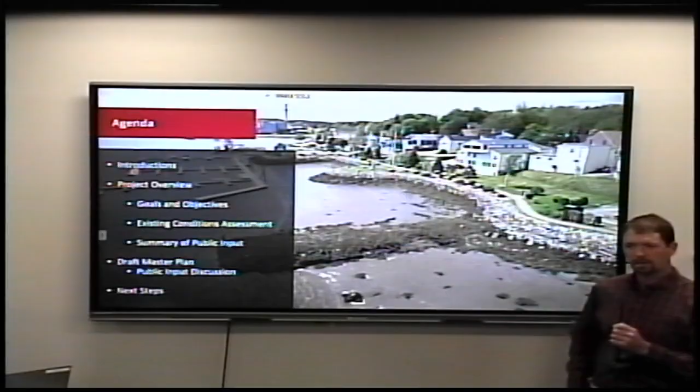We're going to do brief introductions, again, to introduce you to the town's representatives as well as our team that's working on the project. Give a brief project overview, similar to what we did at the last meeting, talking about why and how we got here, what we've heard so far from the public, a little bit about our existing conditions assessment of what we're seeing down at your waterfront. Then we'll do a draft overview of the master plan and open it up for some public comments tonight. As Rich mentioned, folks online can also, I believe, call in with questions. And then we'll talk a little bit about next steps as it's anticipated to conclude this concept planning phase by the end of December.

Okay, so real briefly, my name is Travis Pryor. I'm the project manager involved with this effort. I worked with the town initially on an existing conditions assessment of your shorefront a couple of years ago in light of some of the coastal storms and erosion that you were seeing along your waterfront. My name is John Garreau with GEI Consultants, engineer supporting the concept designs for the improvements here. And I'm Rich Rotella, Community and Economic Development Director. I'm in charge of the SHIP grant that has provided us this opportunity to have this draft master plan.

Jay? Jay Lanfer, I'm Director of Public Works here in town. Mike Wormsby, Harbor Master and Marina Manager. We also have Mark Eastman, who's been participating as a town councilor, who's not here tonight, as well as Luke, who is your codes enforcement officer.

Right, so the project area that we're defining as the downtown waterfront is generally along the length of the waterfront walkway from Steamboat Wharf Lane out to where the walkway ties back into Main Street, just beyond the Irving and Circle K building. And it's anywhere from Main Street, generally looking down to the Penobscot River along the shoreline.

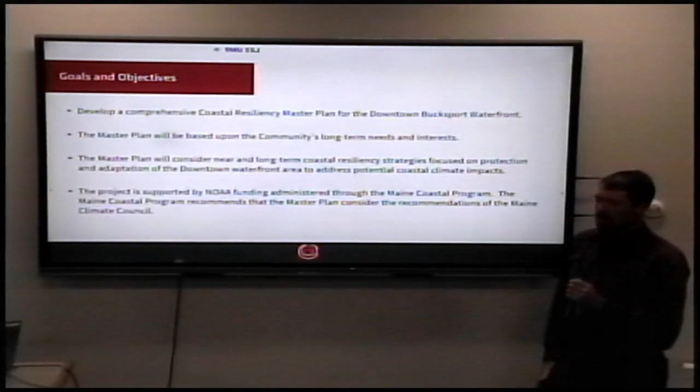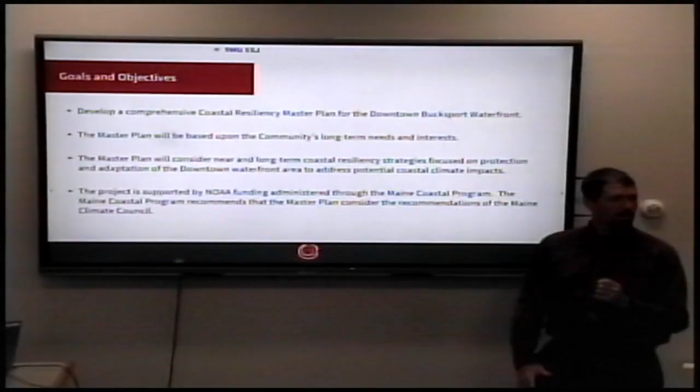Some of the goals and objectives that initiated this master planning effort was to develop an overall comprehensive study looking at the entire downtown waterfront and not just at the shorefront stabilization, which is one piece that needs to happen down there. But while you're at it, what are some of your long-term plans potentially that should be coordinated for improvements to your town pier, to the walkway, to the marina facilities, and so on. So we're developing a concept level overall master plan that suggests coordination with a variety of things that could happen down there to make it more resilient to potential future flood risk scenarios and increased precipitation events.

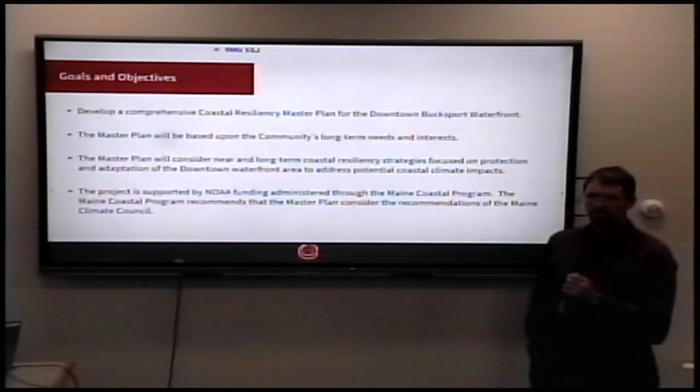One of the primary goals as well is to make sure that the plan is well endorsed and supported by the community and based on the community's values and input and goals for improvements down at the waterfront. To make sure that it considers both immediate and near-term needs for improvements down there as well as long-term ones. Oftentimes when you're doing public infrastructure improvements to an area like this, you could be looking at hundreds of thousands, if not millions of dollars in improvements, and you want to make sure that they're projected to last for a long time. So we do look at some of the climate risk factors a little further out than over the next 25 years or so, all the way through 50 or 75 years for the normal life expectancy of the infrastructure we're proposing.

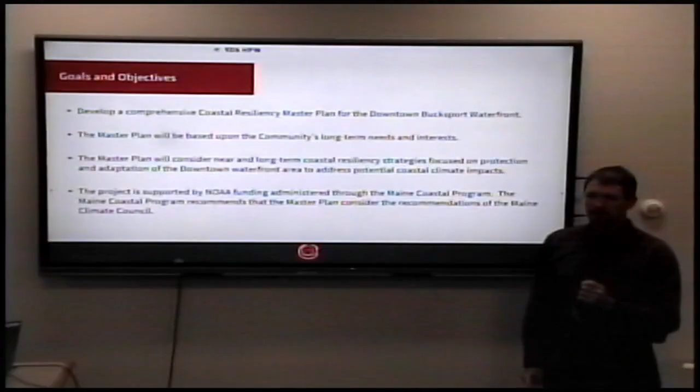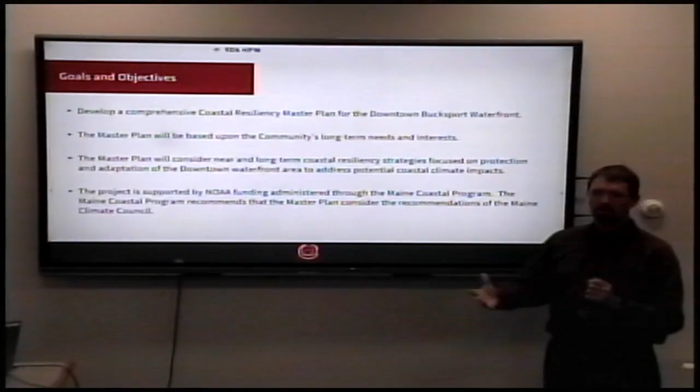The project is supported by the National Oceanic and Atmospheric Administration, who provides federal funding through the Maine Coastal Program for studies of this nature. And they do have some program goals about making sure the master plan considers the Maine Climate Council's recent study in their climate action plan, which has some commit to manage levels in consideration of relative sea level rise, and I'll talk about those again a little bit, and then some prepare to manage levels. Those look at a variety of potential computer modeled scenarios for different coastal flood risks into the future.

We conducted an existing conditions assessment, not only with the shorefront stabilization work in 2022, but also at the start of this project. We know there's a long history of coastal activity within the Penobscot River and along your waterfront. So we looked at some of that, recognizing the overall area as one of the top recognized valuable assets to the community as a whole.

It provides a variety of economic value to the community as well as public interest in terms of recreation, active walking, viewing, and so on, and a strong sense of community value in terms of preserving it based on the longstanding history of use in the area.

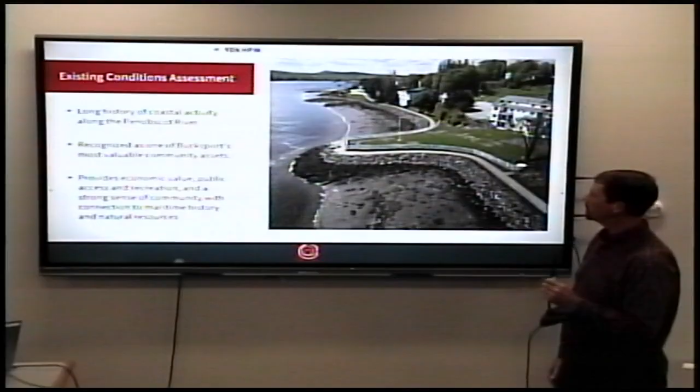There are a variety of infrastructure in your waterfront as well as conditions that you've experienced in terms of environmental impacts, especially of late with the 2022 and then 23, 24 winter storm events. For the most part, fortunately, a lot of your shorefront in terms of the rock armoring and your facilities have held up pretty well. It's a relatively static flood inundation that we've seen versus a lot of higher wave energy or storm surge like you might see on the outer coast.

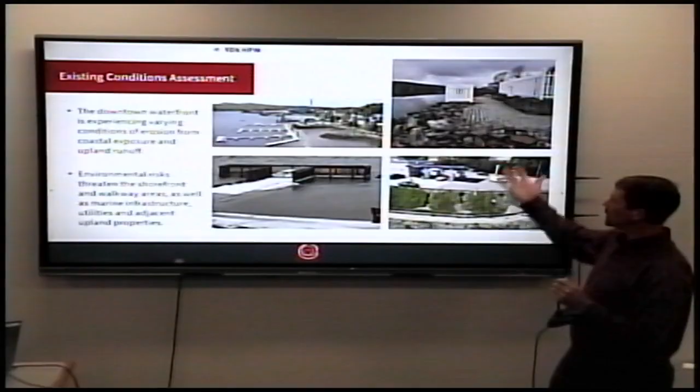And then you frequently have a lot of issues with your walkway, which is right at the edge of the shoreline in a lot of areas, and those unit paver bricks tend to get dislodged, and I think through volunteer efforts you tend to reset those, from what we heard, tens if not dozens of times a year in certain isolated areas.

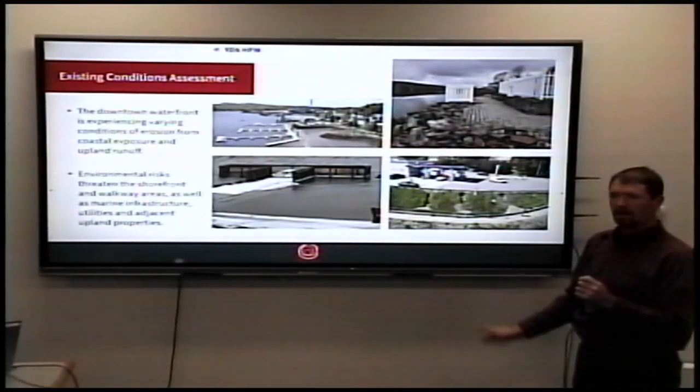And then this area occurred, I think, with some upland runoff near the Irving Station, where you can see some channelized erosion that impacted the walkways and stormwater drainage down to the shoreline. That's been repaired since then, but this is an elevated risk as we experience potentially increased intensity and frequency of rainfall events. Some of the systems, like what has been reconstructed on Main Street by Maine Department of Transportation, look at upgrading storm drainage facilities to accommodate those potential higher storm events, and we recommend that you continue to do that.

We did present a lot of the scientific information around some of the coastal flood risk issues you're experiencing here, so I'm not going to go into those in detail in the presentation. We're happy to talk about that again. Some of the questions came up about sea level rise, and people saying, I haven't really seen much change over the last so many years, or what are the rates historically, last 100 years, maybe last 20 years.

The tidal gauge out in Bar Harbor is the most relevant local one to look at. They have decent data going back to 1950 through today, and from about 1950 to 2000, for Portland, Eastport, Bar Harbor, or a lot of them in the Northeast, the rate of sea level rise was about 0.7 inches per decade. So over 3 or 4 decades, your waterfront may have gone up an inch or 2 or 3, and that's something a lot of folks don't always notice.

And then over the last 20 years, it's increased to about 1.4 inches per decade. Still not a lot that folks have seen in terms of static sea level rise over time. A lot of the predicted models and what the Climate Council is looking at over the next 25 to 75 years are a significant increase in sea level rise, where you might see a foot or 2 of rise, or several inches per decade at a much higher rate. A lot of that's assisted by honed scientific data over time, or better computer modeling to be able to crunch some of that.

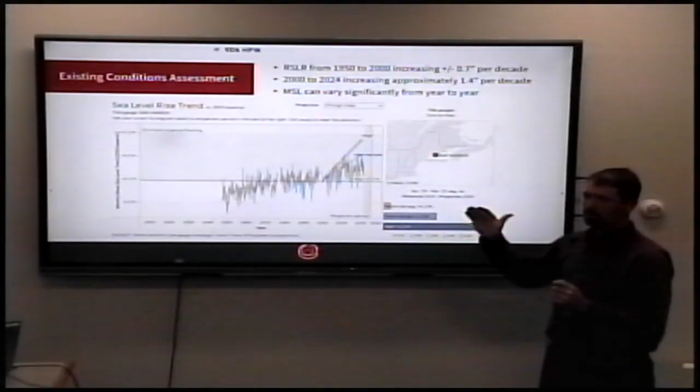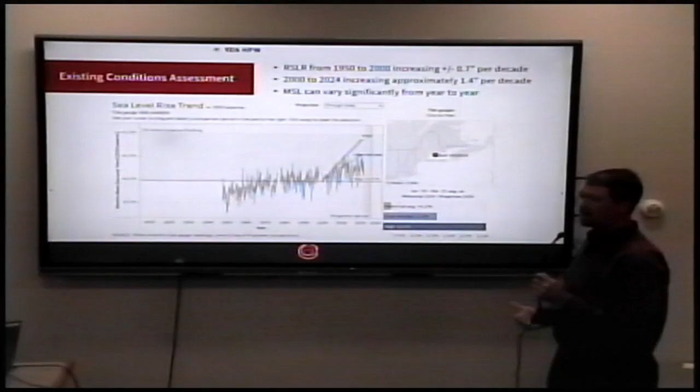And wherever it ends up, it's always being refined. So based on whatever you guys decide to value your risks at, there are some increasing levels of attachments to local, state and federal funding requirements and potentially regulatory permitting requirements to start to meet those, what the Maine Climate Council is calling a commit to manage level or prepare to manage level. So we have to plan for some of that if you're going to make these improvements and investments again for something that should last 75 or 100 years.

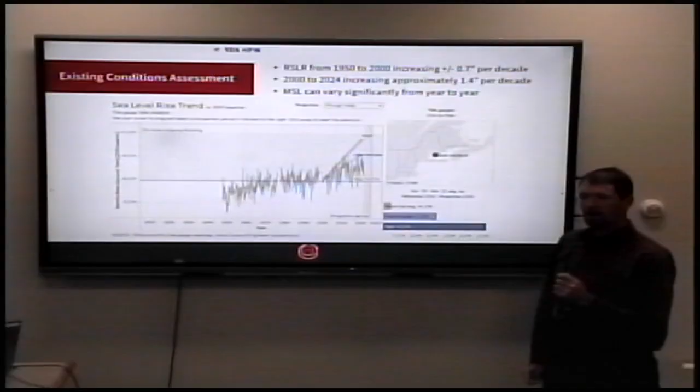We're not going to get too cute with which inch or a few inches that sea level rise may occur at, but we're going to make sure if you're going to invest tens of millions of dollars in improvement that it's at a conservative estimated level of sea level rise. Some of the big takeaway findings we found, and it was great to see evidence of them during last year's winter storms, which were close to a 100-year storm event, was that most of your waterfront is pretty stable and resilient to that type of event. Most of the impacts were to that kind of nuisance erosion of your unit paver walkway or the floats being displaced, but that was an unusual event.

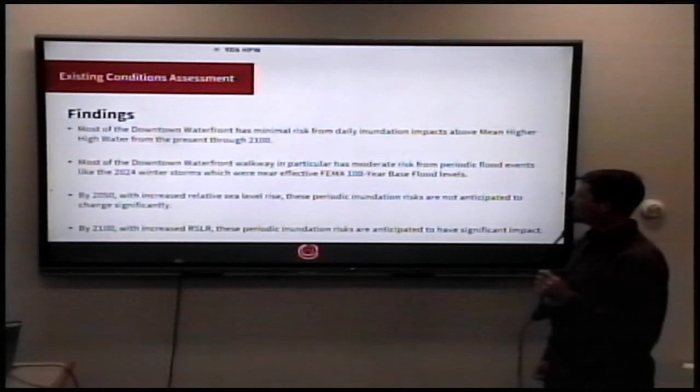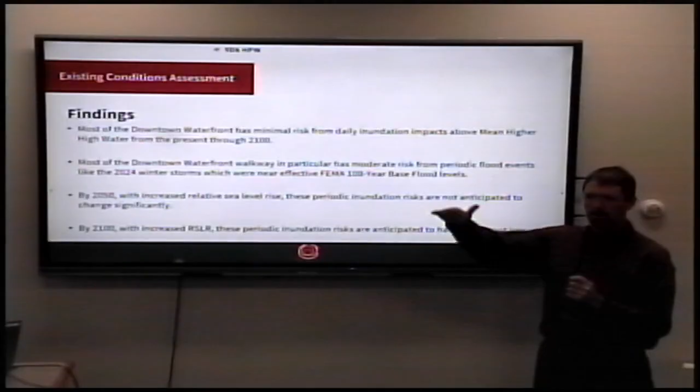And we think through 2050 with the projected sea level rise, when we talked about mean higher high water levels, which is your daily tide, that is lower down on the embankment. And even if you add some of the worst case projections of sea level rise, it's still not going to be impacting most of your waterfront on a daily basis. So it's more a matter of risk tolerance for what happened last winter happening again periodically. So we are recommending some lower level at grade solutions that are more resilient to flooding and adapted to that over the next 25 years.

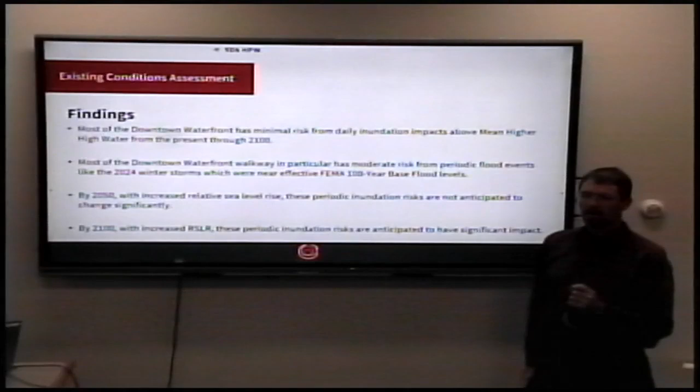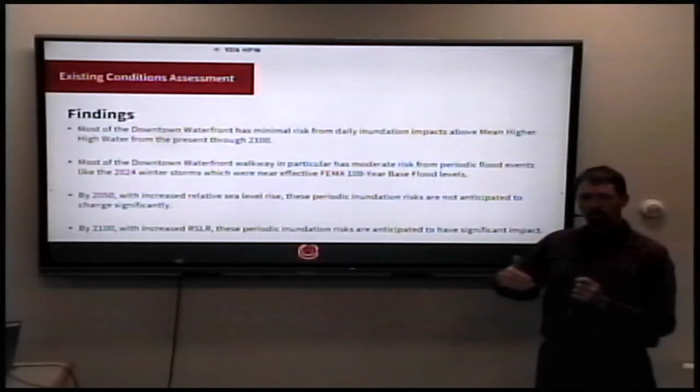And then as you look out further over 100 years, that's where that 3 or 4 feet of predicted sea level rise with some of those storm events are going to start hitting some of your buildings a little bit more, or some of your utilities around your marina in particular, and at the restroom building. And so at that point, it takes a while to get a lot of the momentum and funding, permitting and design for a wall system, which we'll show an example of here in a moment. But we would recommend that you start planning for that from between 2050 to 2100 to make some more significant investments.

For the public survey, we got what we thought was really good response versus some of the other studies we've done around the state. You had over 66 responses to the public input survey. I'll talk a little bit about the findings from that here. It was pretty unanimous that views and the walkability, basically your downtown waterfront, were two of the primary important items that people value throughout Bucksport's waterfront. And we started asking the question a little bit differently, what types of additions and or improvements would you like to see to your waterfront? Walkway again was right at the top, and then opportunities for more parking and park space down on the west end near Steamboat Wharf Lane, similar to what you have up around the Veterans Memorial, was another item that folks would like to see.

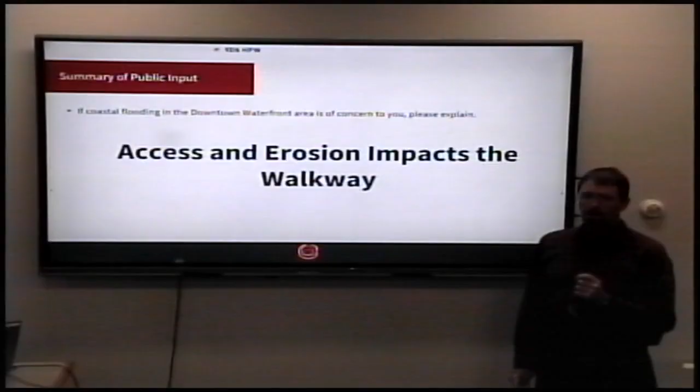We talked a little bit about, have you experienced coastal flooding at the waterfronts? A little bit over 50% of folks said that they have experienced some level of impact from that. And then if coastal flooding in the downtown is a concern to you, please explain why. And most of the responses, again, were around the walkway. As it occurs, they want to make sure that access and erosion impacts are minimized in terms of keeping that waterfront walkway viable. Do you support local, state, or federal funding or regional funding, to support adapting and improving some of the resiliency of your downtown waterfront with these projects? And it wasn't 100% unanimous, but it was a pretty good level of support for investing in your downtown waterfront.

What are 3 most important things in the downtown waterfront that you would like prioritized for protection? Again, the walkway was the top one by a lot, but then the next one below that was the town dock and marina area, and then next in line was at-risk buildings. We used the museum or the gazebo or the restroom building, some of those ones that kind of lightly get touched or are right on the edge of getting flooded now, and may need to have some adaptive measures put in place in the future.

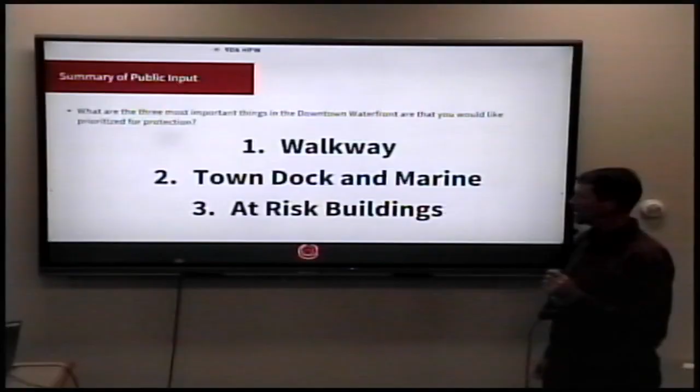We held a public workshop here in this meeting. So there were around 20 or so folks that showed up for that. We had a lot of good discussion at that and a lot of similar responses in terms of the views and the walkway being the primary assets that were valued by the public at that meeting.

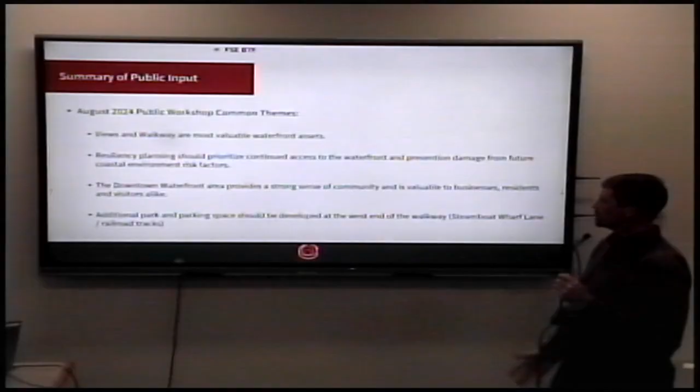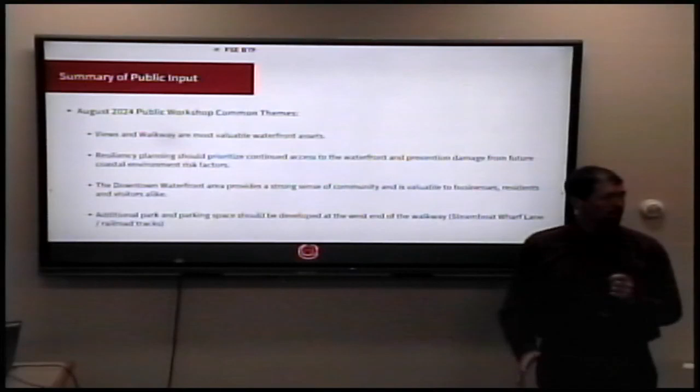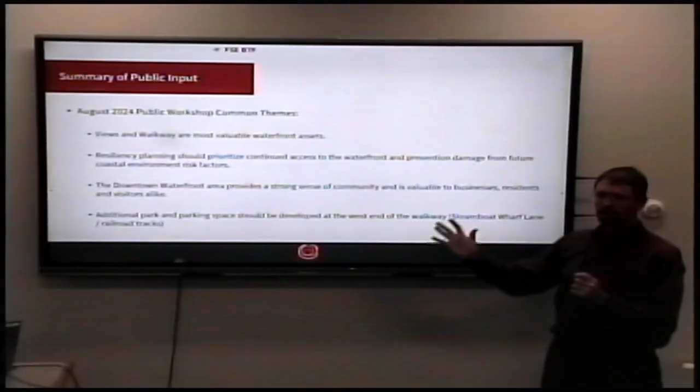We heard a lot about if we're gonna make these revitalization improvements, that they should continue to prioritize protection of your waterfront from coastal risk, elevated risk scenarios. It was noted again that the overall waterfront provides a lot of value to the community in terms of a strong sense of community of what Bucksport is for businesses, residents, and for visitors. And again, the additional park and parking space down at the west end, if you will, down near Steamboat Wharf Lane, is a primary theme of importance.

We're going to look at this a little bit now in terms of recommended improvements by 2050 and then recommended longer term improvements by 2100. The initial one is to replace that brick paver walkway with a paved walkway system that's more resilient and adaptive to being overtopped by periodic storms. Also to widen it to 10 feet width at a minimum, which will make it more plowable.

Consider storing some of the items like your seasonal floats further upland as sea level rise increases over time. So start planning for an area to relocate that. I know it's very convenient, and you have the crane brought into place, so you can store them right on site now and put them in place. But at some point, you may have to relocate those upland.

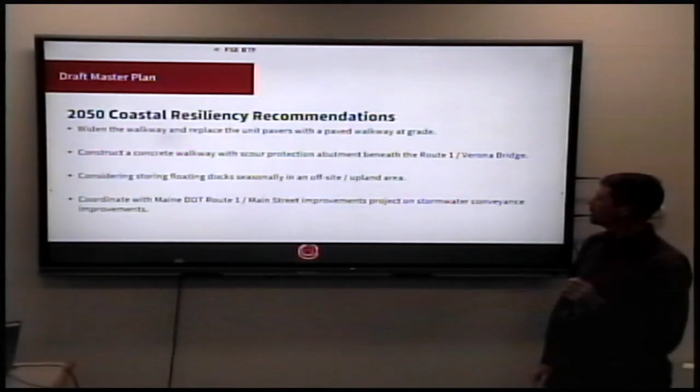Also, again, there's going to be some coordination with private property owners, not only for widening the walkway, but there's also an opportunity potentially at 26 Main Street, which the town is talking with that owner. That's where there's a point of land that they have, and the walkway is pretty tight right along the water's edge in that point, and is susceptible to tidal erosion quite often. So there's an opportunity there to maybe move the walkway upland a little bit, and we'll show a location for that here.

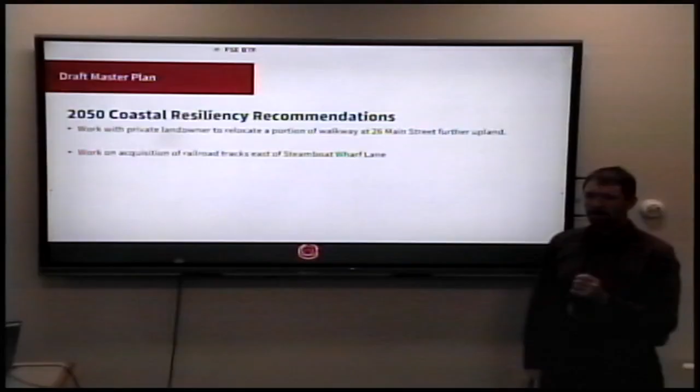And then opportunities to start. I know you guys have been talking about it for a while, and it may take a while, but acquiring the railroad tracks down on the west end as well too, that haven't been used for a long time. There's an opportunity there if you want to do the parking and some of the park space improvements. That's a lot of real estate that could provide benefit in that area.

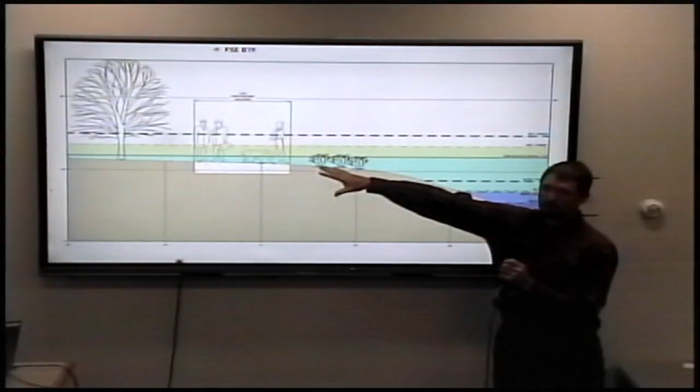So not a very complex solution yet, but here's what this typically looks like. You have your mean high water level kind of way down your embankment. Even with the 2050 commit to manage levels for sea level rise, you're still well clear of where your walkway is. This walkway that's shown, this 10 feet wide, is generally recommended to follow your existing walkway, which is 4 feet wide, so it's just getting wider, but it is in that same location relationship.

You have this kind of teal blue area, or blue-green. That's where your 100-year effective FEMA flood level is now, and that's about what you experienced last winter. So there was some overtopping around your town pier and some of your low-lying areas in the parking lot, on the order of 6 inches or so, or maybe a foot of water in some areas. And then the commit to manage level for sea level rise is this kind of green area. So it's going up, I think, at 1.8 feet or 1.5.

So a little higher, but we still think most of your waterfront could withstand that with some adaptability of paving the walkway, and that your shorefront is still pretty stable with a relatively static level of inundation, and that's not impacting a lot of your buildings in the upland area yet.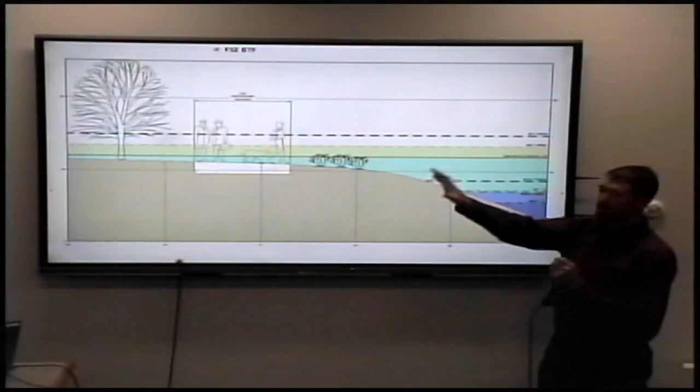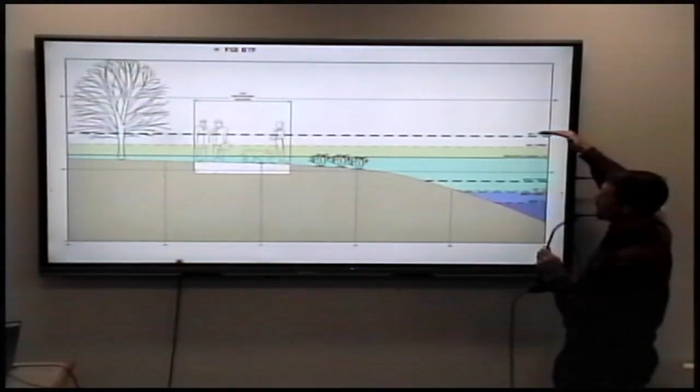And then this is the prepare to manage level that the state asks you to look at. You're only required to plan for the commit to manage level, but while you're at it, if there's a reason to look at that prepare to manage level, we look at that too. But again, this doesn't show all the way to the upland areas. We don't think that's a significant factor by 2050 for how most of your waterfront operates. We've seen these plan views before, and those represent, again, some of those different shading scenarios.

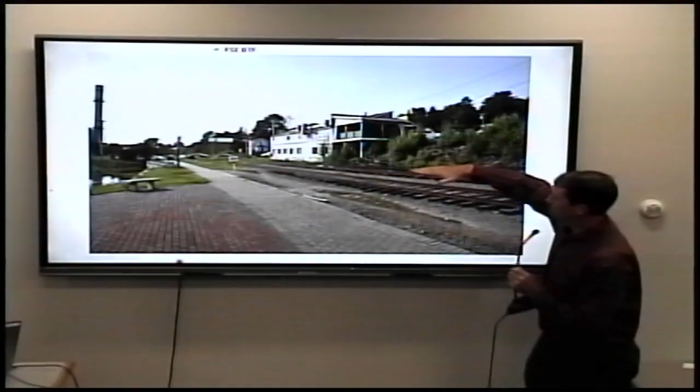Then about 6 inches or so, a foot, a lot of this first section from Steamboat Wharf to the town pier along the top of that waterfront could potentially flood during a 100-year storm event. And then with that commit to manage sea level rise on top of that, until you get to the gazebo, most of this area is still just the railroad tracks that are flooding. Again, visually, I'm trying to point to it on the plan, we're just shy of these buildings back here, but your flooding could basically just come over the railroad tracks and die into the existing embankment in this area.

And then similar in the other direction, and you don't have any buildings to protect from that stretch down to the gazebo. So most of this area we feel is pretty stable, with the exception of wanting to pave the walkway versus those unit pavers.

I guess this is probably one of the areas that's more complex, between the town pier and the hotel just before it goes upland towards the town office. You have your town pier and associated parking, a gazebo, the public restroom, the history museum building. You have your harbor master's office and the marina, and then you have some fuel tanks, and you have some park space as well.

Those again, that kind of bluish green level there represents flooding like you had last winter, which is an area that flooded. It was on the order of a few inches in most places to maybe up to a foot, where some of those seasonal floats are stored and floated in that area. I believe it was more over here. It was at the town dock. It was at the town. Yep.

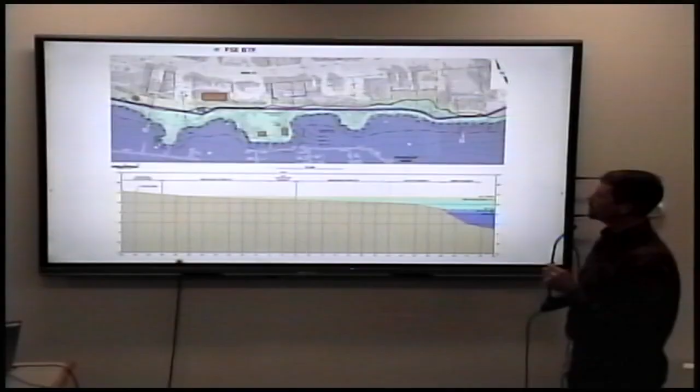So again, the walkway would stay in place where it is, be 10 feet wide. And some of the buildings that we show, although they held up to flooding, like the gazebo, for example, is in that flood zone. It still has some stairs to get up to the top of the gazebo. So we don't feel that those are at significant risk by 2050. And then that section terminates as we start to head uphill here towards the town office, just past the Fort Knox Inn.

Just looking back at the waterfront, you see a lot of buildings in this area that are fairly close to the walkway and fairly close to that flood zone, and then you have your marina and then the town pier just off in the background you can't see, and then this park space. And a closer look at grade, the lower level of a building like that restroom is pretty close to being susceptible to flooding. And so we do recommend in the long-term horizon, which we'll talk about next, by 2100, either relocating or elevating some of these structures or building a wall to protect them in a tight space like this.

And again, the town dock, which was pretty much right up to the flooding level, to the town pier, and we were actually working on another study with GEI for a redesign of that structure, so there may be an opportunity to elevate that in the meantime. It could temporarily have access issues along the approach during a flood event, but for the most part it would be accessible, and that area is pretty resilient with the pavement and the armored shoreline to hold up to that static flooding.

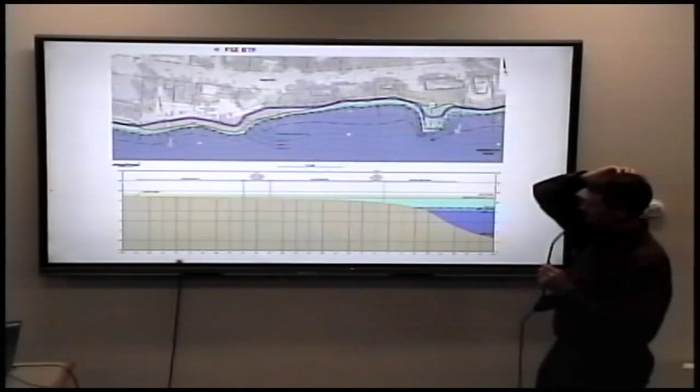The next stretch is from that Fort Knox Park Inn all the way, continuing almost to the pedestrian bridge at the Veterans Memorial. Again, there's a lot of elevation in this area, so I think for the most part the shoreline and the walkway are pretty safe. Widening the walkway to 10 feet in width will require some level of cutting into the embankment in some areas, or some additional fill, which might steepen up some of the lawn space, in particular where you can't widen the walkway into your parking lot here at the town office.

And then here's that area we talked about where the town is starting to work on discussions with private property owners about relocating the walkway further upland versus this exposed point of land. This is what that relocation of the walkway looks like. It'd probably come around the corner, kind of angle towards the flagpole and then back, but not be right out at the end of the peninsula.

And you can see that grade elevation going uphill here towards the town office, where the walkway is pretty safe, but if you were to widen it 10 feet up in that area, you'd be chasing the grade a little bit downhill, or we may be impacting the parking lot. So those are design details that would happen during the next phase after this conceptual planning is completed.

Then the last area is the area where there's the pedestrian bridge and a stream coming out from under Main Street, the Veterans Memorial, and the area with the park and parking lot space. The underpass under the Route 1 bridge, the Verona Bridge, and then this final stretch was kind of on a steep embankment behind the Irving Circle K building back up to Main Street.

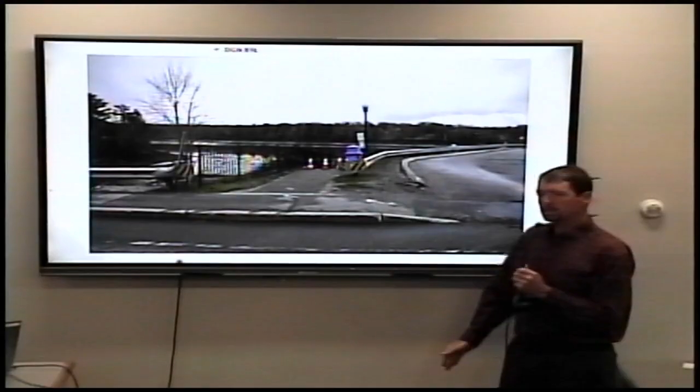There are some areas, and the design details will come at a further date when you advance the improvements, but conceptually we think with some level of reconfiguring a guardrail like this, or the fence, to widen a 4-foot walkway to 10 feet is still doable, but it is going to be a little bit of a site detail challenge in some areas.

This is an area where you have a 4-foot wide walkway. You can see a significant level of erosion occurring in this area, and you have that retaining wall already just to accommodate a 4-foot walkway on the steep side slope. So going to 10 feet, at least initially, if you were to invest in that at grade, you'd be pushing a ways back into the embankment. You're really not allowed to encroach much further out over the river.

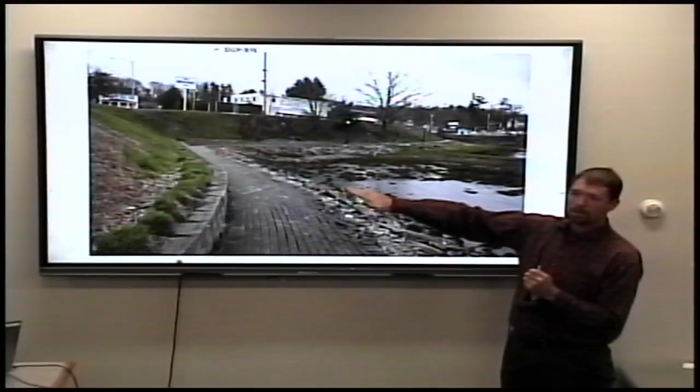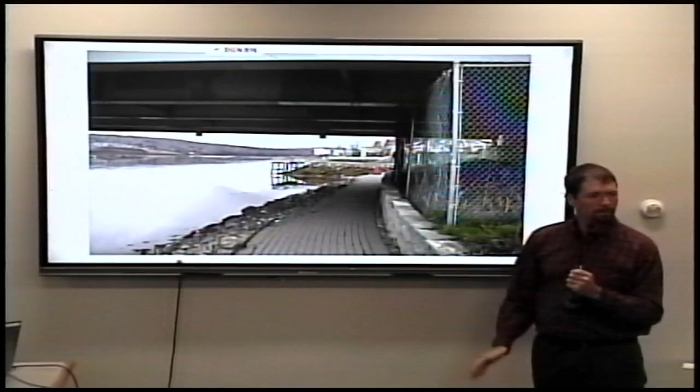So this is an area where, even though for most of the walkway we're recommending initially keeping it at grade, you might start with elevating it up in this area 5 or 6 feet or so, so that it's easier to fill and tie back into the embankment. It's that underpass area, and we do know that there's an outfall for drainage from the bridge that kind of discharges on it, but it also erodes in general from the river inundation right along the edge.

This example is Route 196, and I might have that wrong, in Lisbon, on the Androscoggin River, and what they have is a really solid concrete walkway. It's part of an overall regional paved walkway system, and you have more of a concrete scour protection wall associated with that on the outside. And it's known that you have limited height restrictions underneath the bridge like you guys do, so you really can only elevate it so much in this area.

But a more durable armored walkway like this will at least hold up and allow for that inundation of the flooding to come over it without having to reset those pavers. And we feel that paving just with asphalt in this area and then the rock below would not necessarily hold up as well to the inundation; the edge of that pavement would probably unravel in such an exposed area. So we would recommend something like this.

Again, just looking back at the town's fish pier and the Maine Water utility building, public restroom, and then the parking lot and park space. Again, we think an at-grade walkway would be fine through this area. We did want to ask, and maybe we can talk about it tonight in detail, about widening, or a goal to widen the path to 10 feet for vehicular maintenance, for access for plowing or snow blowing equipment.

The bottleneck would be that bridge potentially, so you'd either need a turnaround just before it to go all the way back out to the town office, and then you could access the other side just fine from the Veterans Memorial area, or you'd look at replacing that bridge with a 10-foot wide or so bridge. So that's something to think about a little bit.

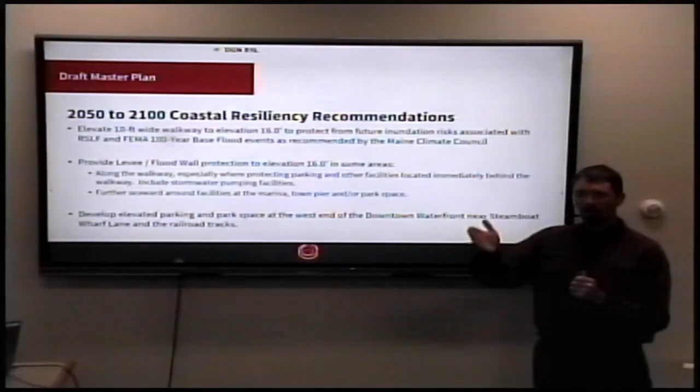And one of the ways we're looking at doing that is exploring options with either a levee, where you're elevating the embankment armoring, and a levee is an earthen berm which then comes back down behind it where you're not constricted by buildings, things like that, or just a fill structure that would tie back into the embankment. There are some areas, like around the marina or the town pier, where you would have a vertical wall incorporated with that levee, so that

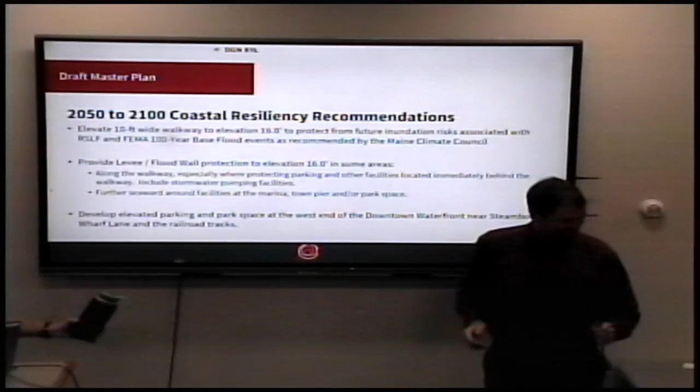Maybe get some water. Yes, I talk quietly, but I don't usually use my voice. Told you might have to talk, John. Second string. Thank you. Sorry about that.

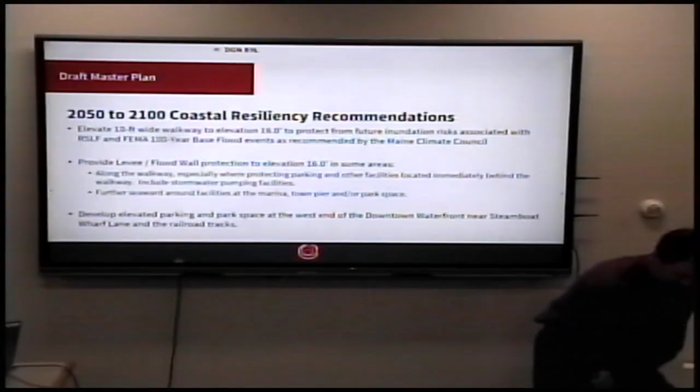So in those areas where you have that vertical wall and a shorter area to protect with encroaching buildings or parking or other facilities nearby, you can't just fill into the upland grade. We would recommend putting in a sheet pile wall in the middle of it. I'll show an example from another project we're looking at doing that for. It does a couple things. If you had some wave energy or more significant river flow and you were to lose some of your rock in front of that wall, the wall is in place. So it's kind of a redundancy, an extra fail-safe in case your embankment does erode during a storm.

It also allows you to maintain some of your at-grade structure or not have to fill up against an existing building nearby, which would then require that building to be elevated or relocated. One of the downsides to doing that vertical wall is you are creating a bathtub behind the wall or levee system, and you do need to have some stormwater pumps in place in case you have a significant rainfall event, like we typically do with storms, so that stormwater coming downhill doesn't build up behind the wall and start to flood the structures behind it.

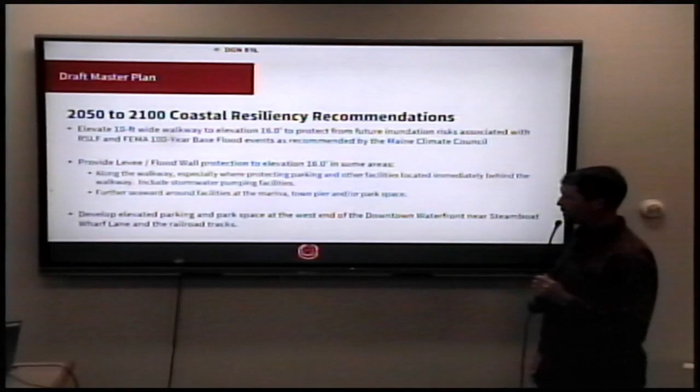It is then a recommendation, once you've acquired some of the property, hopefully from the railroad, and/or worked with the private property owners for a portion of Steamboat Wharf Lane, to start working on park and parking space down on that end. At this point, you'd want to start the conversation sooner, but if you're going to make some of these investments, you could consider them in terms of that levee wall system or elevating buildings or utility structures to allow them to be adaptable during those periodic flood events. We still don't think daily flooding is going to be an issue with mean high water, fortunately, even under worst case scenarios in the future. So it's going to be a pros and cons prioritization discussion with the town on whether you want to start relocating structures or build a levee system to armor and protect them.

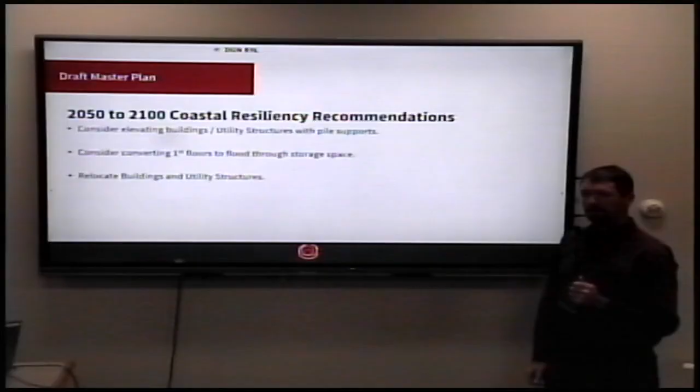Yep, sorry, that does cover that.

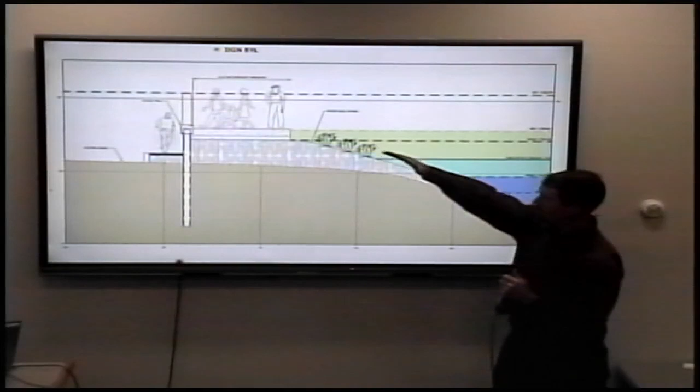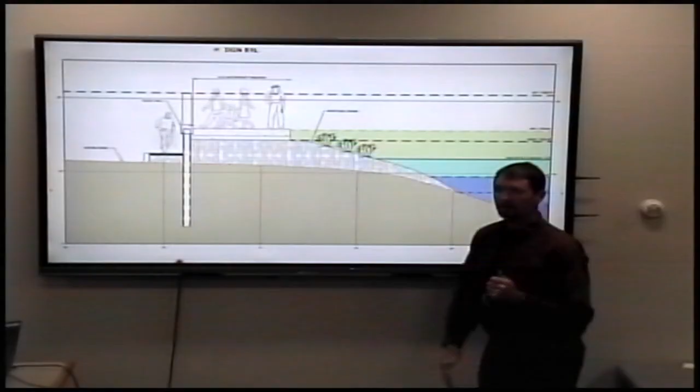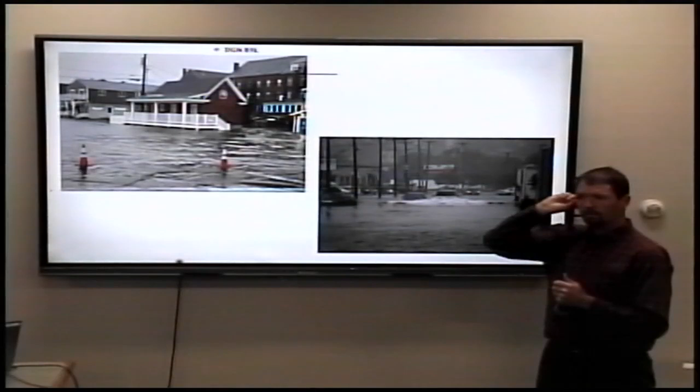Which you're typically required to protect for critical infrastructure like wastewater treatment facilities. And that picture from last January storms represents 4 feet of water in their parking lot. And if they had built that to BFE plus 3 feet, they'd have a couple feet of water in their new restroom building. So again, if you're going to make some of these investments in your downtown and they're going to cost a significant amount of funding, then we recommend that you be conservative in your approach.

This does not account for some of the future sea level rise scenarios that are predicted. So they are looking at a similar effort like we are looking at here with a levee or kind of wall system around the perimeter of the parking lot in addition to elevating structures.

This was downtown in Portland where I-295 going through there effectively operates as a berm or berm and levee system from the Back Cove. And then the lower Marginal Way neighborhood has stuff like this happen every once in a while during an intense thunderstorm. So this was not a 100-year flood event. This was a lot of stormwater coming down the hill from Portland, hitting all that pavement, and then having a few feet of water that folks had to drive through as the high tide was up,

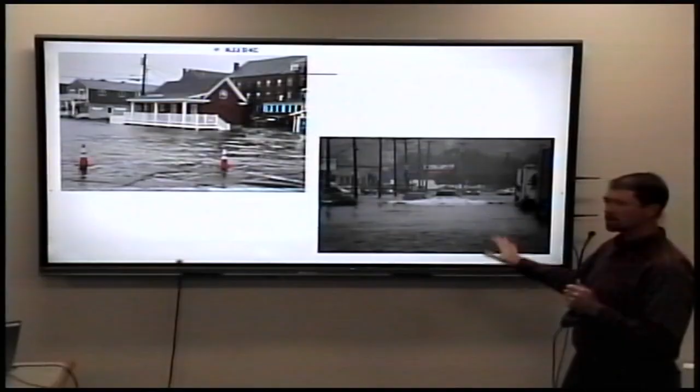and the water couldn't just discharge out naturally. So they've been working for a few years on a subsurface storage system to deal with this. So if you're going to build a levee or berm and can't fill back in the existing grade, you're creating a bathtub that you need to deal with this scenario as well.

This project is in Machias. It's a little bit advanced ahead of Bucksport, but not too far. We went through the conceptual planning. This, again, is similar to the typical section we just showed, but it's an area where we merged it in to show what it would look like where the wall would be exposed in areas where you have parking coming right up to it and where you wouldn't want to fill right up against the backs of some of these buildings. And then you have that kind of earthen berm, you have the walkway and the levee system in front of it.

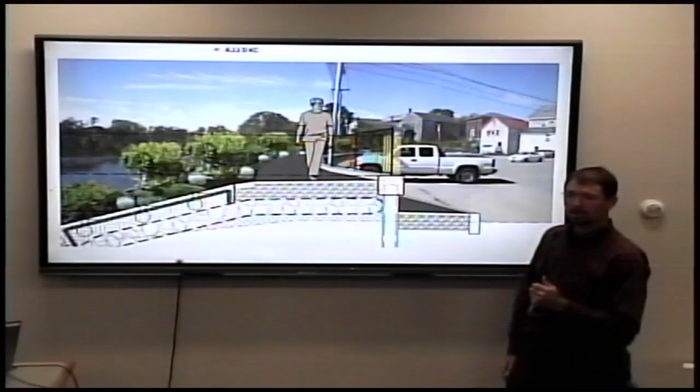And if all this were to get wiped out due to coastal erosion and flooding along the river, you still have this sheet pile wall and a concrete cap, which you can also add on to, so you commit to manage at a certain level. And if sea level rise does get worse over time, you could add on to it. But you've already invested a lot of money in the base infrastructure. And then that adaptation is relatively easy.

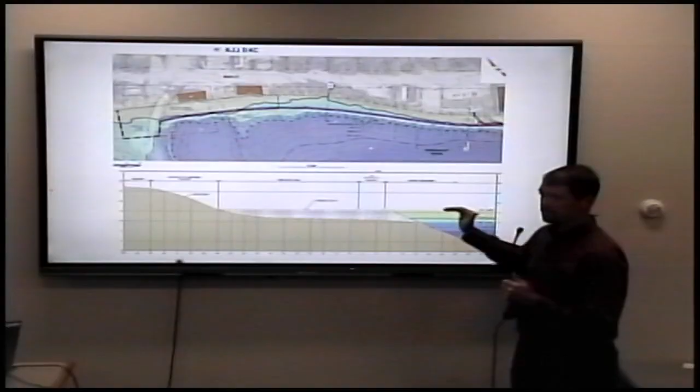This first stretch from Steamboat Wharf Lane to the gazebo, we're recommending just an earthen berm that is filled all the way back into existing grade. This is pretty close to coming up to the bottoms of some of these buildings, so there may be some coordination needed to tie in grades there. We also have heard that DOT has been working with the town on some access improvements and regrading of Steamboat Wharf Lane, so we'll want to make sure that that's coordinated as well.

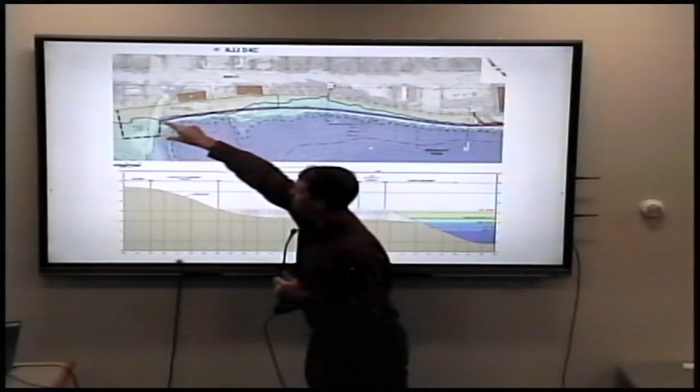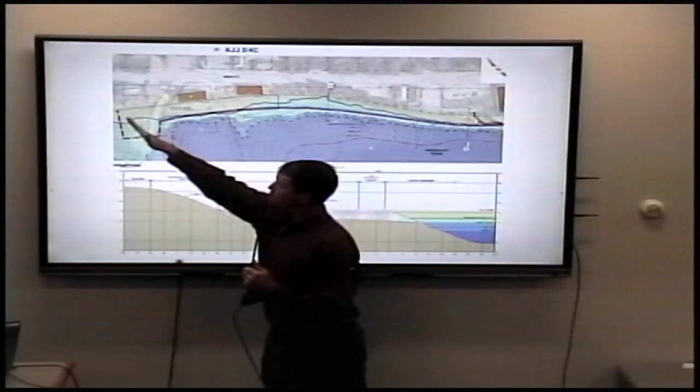This area is the area we are considering for also proposed parking and park space options as requested. It would be great if you can do it on adjacent private property next door along Steamboat Wharf Lane. That's an area that we'd recommend you consider for further coordination. It will definitely help with opportunities to tie back into existing upland grade, because it is challenging to end a wall anywhere in here along Steamboat Wharf Lane without impacting access to those buildings.

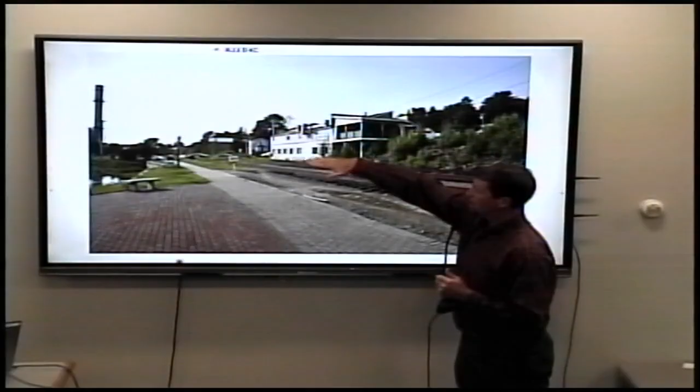And again, with these higher level scenarios, you might be filling right up against some of the lower levels of these buildings, and you're either kind of grading back down and dealing with stormwater behind your levee, or potentially coordinating with some of these folks to abandon or elevate or do some other flood measures to protect the lower level of that building.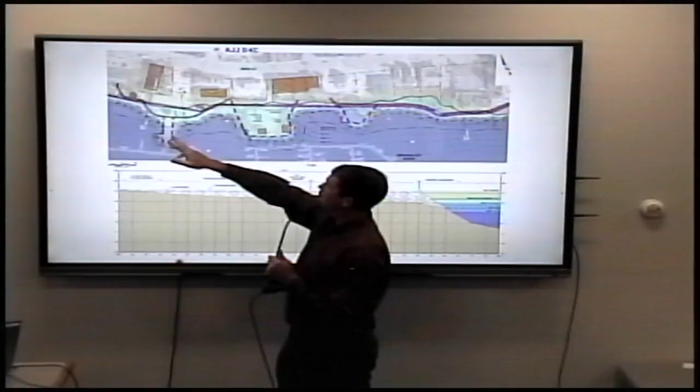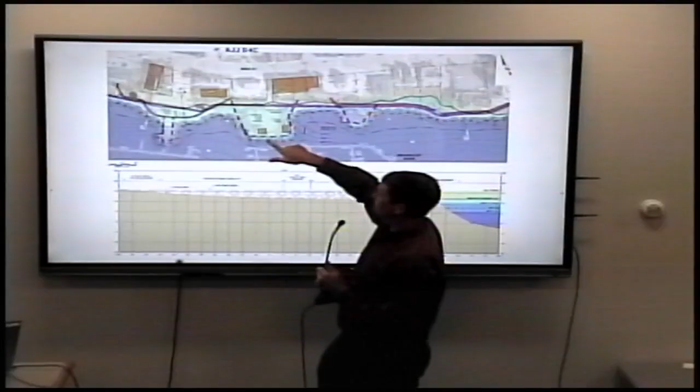An alternative as well, and we'll provide different costs for doing kind of the red recommended baseline wall, if you will, and then some of these alternate locations if you wanted to extend a wall or levee system around your harbor master's building or the pier, versus potentially just elevating some of those structures and leaving those areas susceptible or adaptable, if you will, to periodic flooding.

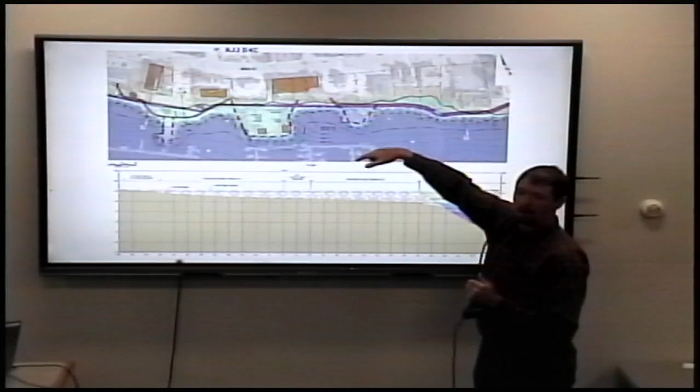So there's a cost-benefit analysis. Is it worth it to try and protect erosion of this park space? That's kind of a community value, and we will provide some cost options for alternate locations of a levee system to protect those. And then that wall system with the walkway and levee ends just a little bit past the Fort Knox Park, as you start to go uphill towards the town office.

Again, this is an area I talked about before, but I can illustrate this walkway is about 4 feet wide. If you're going to make it 8 feet wide or twice as wide, you might be able to gain a foot or two with a guardrail towards the parking lot, but you're going out 4 or 5 feet further out this way towards the river. So there'll be some level of regrading done on the embankment as well to make this walkway wider.

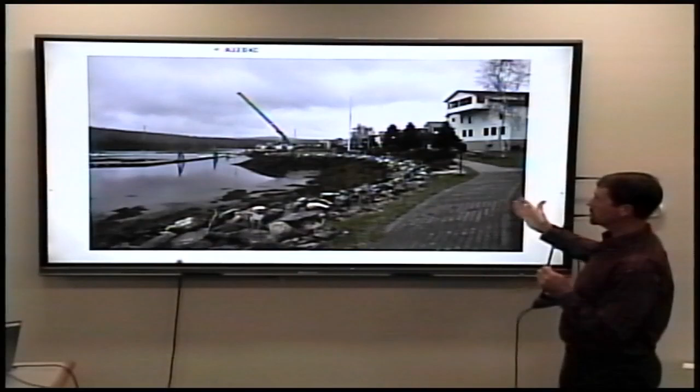Again, if you're looking back at the marina area, you can see a lot of the buildings in this area are fairly close to the walkway. So the opportunities to elevate this area about 5 feet and then tie back into grade are fairly limited, and you have an access drive coming down as well. So a lot of this area we think will be the elevated walkway with stabilized embankment in front of it, and then a vertical wall right behind it. And then you'll have to deal with this trapped stormwater in the space behind the wall.

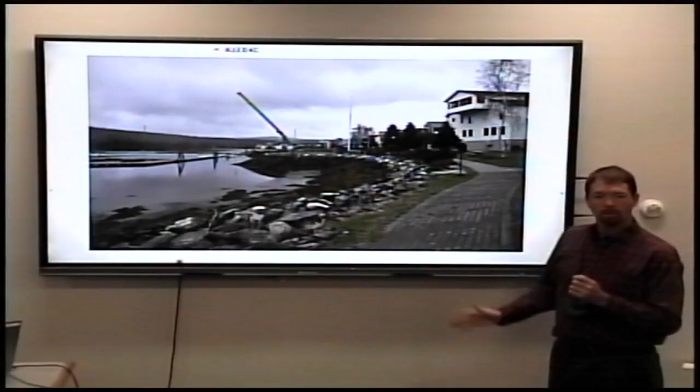And similar thing, you have an elevated walkway and a wall right behind it so that you could potentially keep a building like that in place, or you could consider relocating or elevating some of these buildings. So we'll present both of those options and pros and cons and costs associated with them in the final report. And same thing with the town pier, that is being redesigned in a way that if you did want to elevate it in the future, that's an option. With the access drive, excuse me again.

And most of your shorefront is pretty stable to the level of flooding that you saw this past winter. So we do suspect that if you wanted to just protect some of the buildings and upland parking, you would run that berm, an elevated levee around the parking lot, and consider just elevating the pier, but allowing that access drive to be temporarily inaccessible during flood events.

From the Fort Knox Park Inn all the way almost to the bridge at the Veterans Park, the elevation is such that we don't think, again, you'll need to do an elevated earthen berm or wall system in most of this area, including if you can work on getting the walkway further away from the point. And we did talk about this. Some of this will be elevated a little bit, but it can tie directly back into the embankment, so we don't think you'll need to do a sheet pile wall in addition to just elevating the walkway in this area. Really same thing for this picture.

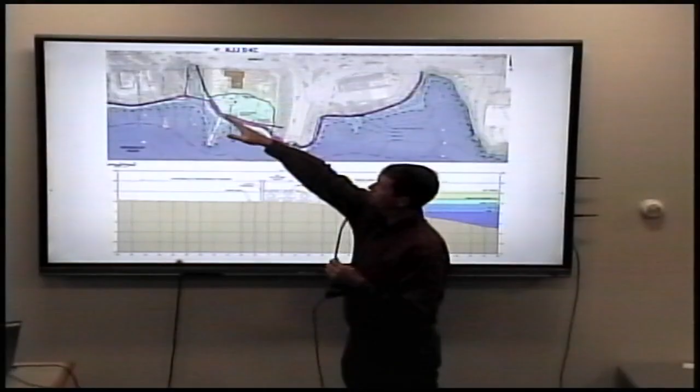And again, as you get towards the Veterans Memorial area, we would recommend that you do a sheet pile wall, an elevated walkway that actually goes a ways up the river. We did hear this last winter that you had some overflowing coming out of the stream that came close to flooding the restrooms. So we recommend that you invest in protecting that entire area with the wall system that ties into the side of the Route 1 bridge approach.

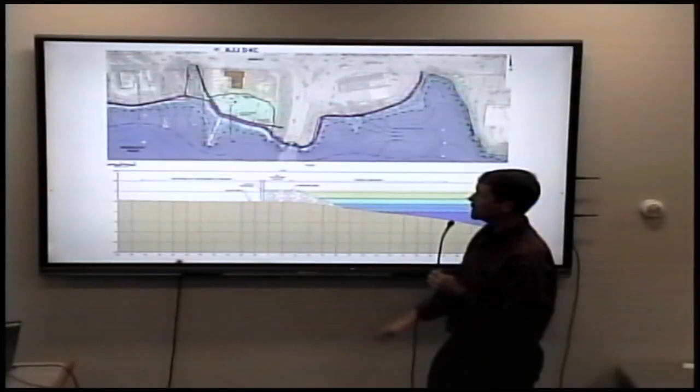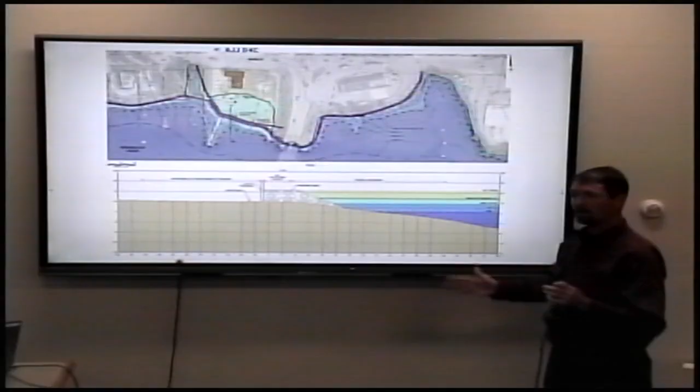The understanding that you really can't do too much underneath the bridge other than just make that surface more stable and resilient to flooding. And then as you ramp back up, you're talking about a 10-foot wide walkway, and this is that stretch that if you are going to fix that in the near term here, we'd recommend that you also elevate it as well so that you don't have to build it now and significantly cut back into that embankment. You'd elevate it and be able to tie into the embankment a lot easier.

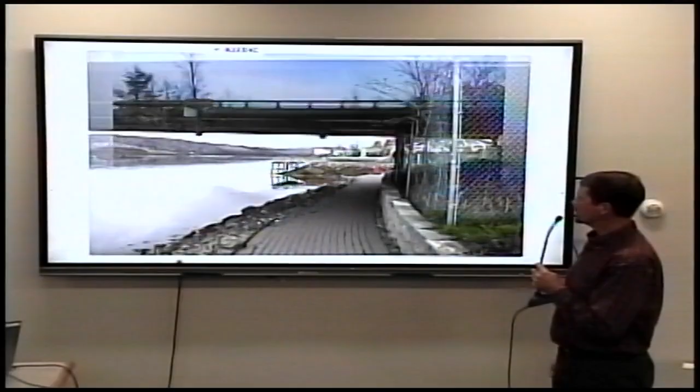Yeah, same thing, that is a redundant picture, but you do have some width and access issues at the top for a 10-foot wide walkway where you'd have to relocate that guardrail that we would coordinate. Yeah, you guys have seen these, so I won't go over those again. The same type of issues, the same resilient but at grade and flooding walkway.

All right, so I know that was a mouthful. Thank you all for your input. That's guided us along the way and helped us as we have some experience with other projects or other planning efforts around the state that we think are applicable here as well. I'd like to open it up at this point to questions or comments from the public. And I guess if you want to talk, maybe come up to the microphone.

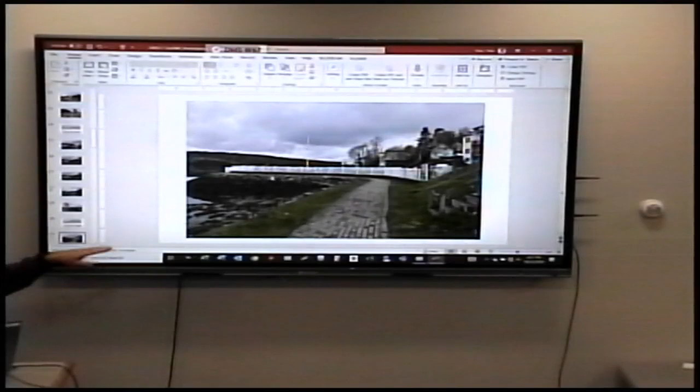Right there. So there's a fence, but there's about an 18-inch high retaining wall. And this walkway is again at that grade level 11. You had almost 2 feet of flooding with this last winter storm, because it got up in our lawn space. Most of the area held up pretty well. There were pavers that were dislodged and eroded, but we feel your shorefront is pretty capable currently to withstand a relatively historic flood event like that with a couple feet of water in downtown.

But beyond that, when you start planning towards 2100 and you're looking at 3 or 4 or 5 feet above that of water, that's where that walkway would come up 5 feet. And we think some of your buildings and other infrastructure would not withstand that level of sea level rise.

One thing our town council has been discussing, and Larry Walls is here from the Historical Society, is that other red building, not the bathroom one, but the one that sits a little further. During those storms, the water got right close to the building, but the building's elevated and sits on some posts. What's the recommendation for there?

For what happened last winter, it's leaving things at grade with the walkway, but when you start looking out beyond 2050 and more significant sea level rise, that's where this area would have that earthen berm and elevating that walkway up about 5 feet, but it would probably have that vertical wall immediately behind it. Otherwise, if you were to fill behind it, you'd have to look at elevating a building like that or relocating it.

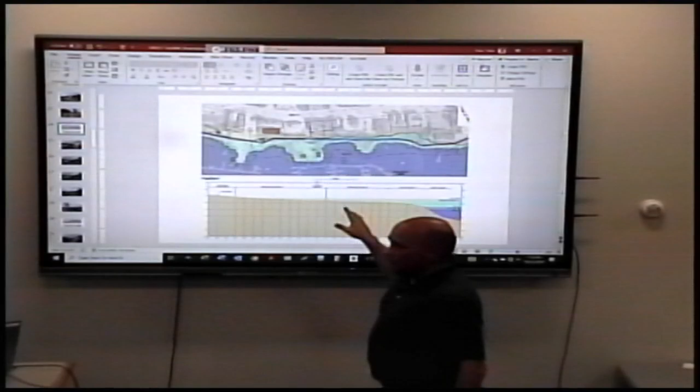You have to have a legitimate excuse, but with climate change and sea level rise, has that changed there? Generally, they prefer you retreat, I think, more than fill into it. Right. Unfortunately, there's some trade-off. I think you've had conversations with Maine DEP. You have some remnants of historic waterfront structures in the intertidal zone, and there's some opportunity to abandon or trade some of those spaces for other areas. That's exactly what they told me.

We could rebuild what looked like used to be a pier, so Maine DEP can support that, but Army Corps may not. Yeah, and they were both online with that. But my reason for asking that is that area right there by that hotel, that water goes a quarter of the way up that hill by that hotel. It comes in by their back door when this floods and it rains. That's a very bad area. It shows it right up against it. Yeah, it really does.

So when the linemen are staying at the hotel and they're outside, they're standing on a step, because if they step off that step, they are in water. So my thought was, if you can at least fill that in, riprap maybe with a berm, to try to help prevent some of that from happening, because there's that little section of land that's available at about 1/3 tide maybe, where you can start to see the remnants right behind the hotel. If you could even go and fill in as much as there.

I won't say it's impossible. You have to do a fairly thorough alternatives analysis, but they do have fee in lieu of compensation programs for filling and impacting coastal wetlands if there's no other reasonable alternative. And in a tight area like that to protect that building, that might be an option. But if the seawall kind of levee system works and it's above the highest annual tide line, they'd probably prefer that. But it's not 100% no. In particular, they would like you to stay above the highest annual tide level.

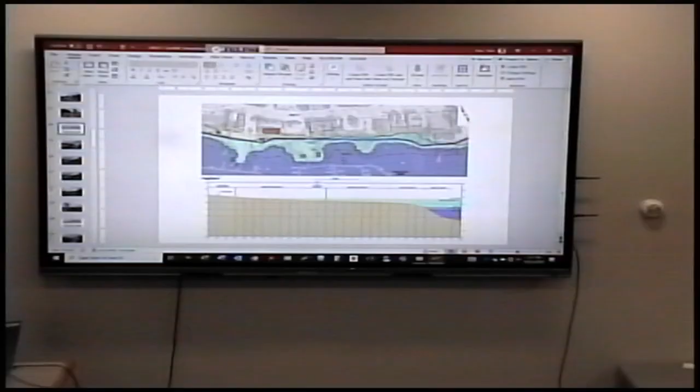Better than I got. What about you, Mr. Public Works? I agree with what you said. Excellent. Impact for me in my department is mostly the width of the walkways for maintenance. And the fact that you would be maintaining it in the winter. Well, right, you would know. It would increase your workload, but, yeah.

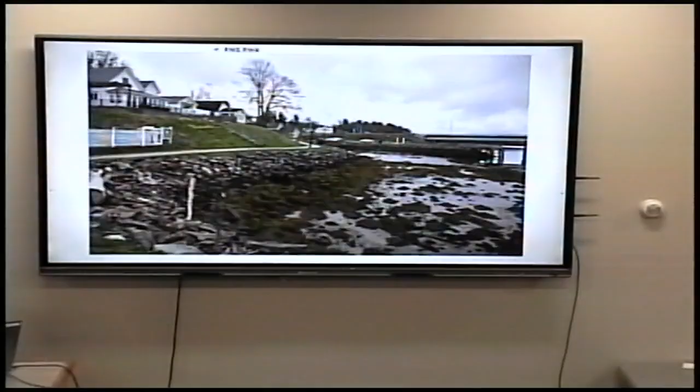I'm gonna skip down to the end here as well, just so I'm prepared for one last piece. And we'll give the town a PDF file of this, so you can post it on your website as well. Okay. Still leave it open for discussion, but we can also talk about next steps when you guys are ready. Are there other questions or thoughts from the public? All right, thank you for the input. We'll summarize our discussions as well for your reference.

Next steps for this project are to update and refine the master plan based on some of the feedback. We'll provide more details about cost estimates and some of the pros and cons of different options, 6-foot wide path versus 10-foot width, or levee and berm versus elevating buildings, and so on. We'll continue to work on that this fall. I think the plan will be to meet with the waterfront committee early in December to review that information and prepare for a presentation to the town council.

I believe Rich has said that the 19th of December might work. It's kind of a limited window between holiday periods. If we need to, we could schedule that into January. We just need to ask the state for permission to extend the schedule. If you do that, you're gonna have a new council between December and January, right? Yeah, but the typical council agenda is the second and fourth Thursday, but in November and December, due to the holidays both falling on the fourth Thursday, a compromise is typically made where it's the third Thursday.